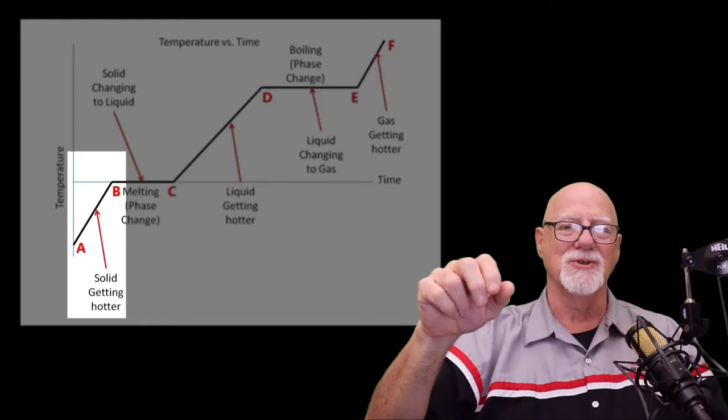Now, once that ice goes from 0 to 32, we added heat to make that happen. And since we saw the thermometer rise, we could see that. It's called sensible heat. It's measurable. We know it happened. We saw it warm up. Now at 32, that ice is going to stop getting warmer. And then as we continue to add heat, it's going to change from all ice at 32 to all water at 32.

Now, since that thermometer didn't rise, if we had a thermometer embedded in this process, we wouldn't see any change in temperature. But we added 144 BTUs to that 1 pound block of ice to change it to a 1 pound block of water. That's called latent heat. It's hidden, because we didn't see the temperature rise, but it took that much energy to change from a solid to a liquid.

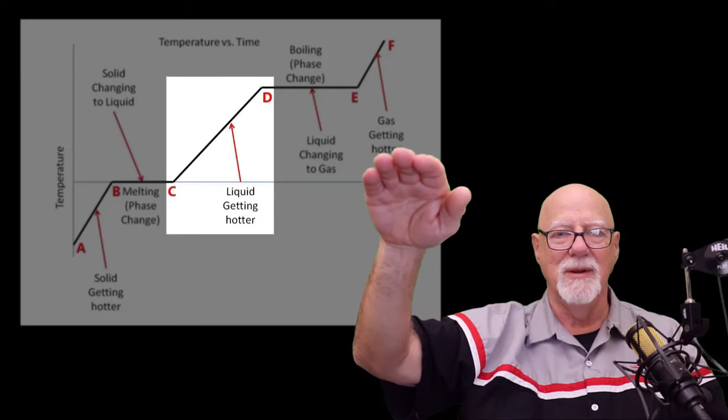Now, once all the water gets over to 32 degrees, we'll start to see the climb again. As we continue to add heat, the water's going to go from 32 degrees up to 212. Yes, we're going to have water at 212, and if we continue to add heat then, we notice that at 212, the line flattens out again. The latent heat we added to change from a solid to a liquid is called latent heat of fusion. And now we get the second state. We're going to change the water to steam. That's called the latent heat of vaporization.

And the magic is that's where it happens. It takes a tremendous amount of energy to change from a liquid to a gas. So to change 1 pound of water to 1 pound of steam, 970 BTUs have to be consumed to make that happen. That's the magic of air conditioning. It takes a tremendous amount of heat to change the liquid to a gas. It's called latent heat of vaporization. Now, we can take the 1 pound of steam, capture that and cool it back down. It goes right back to a liquid.

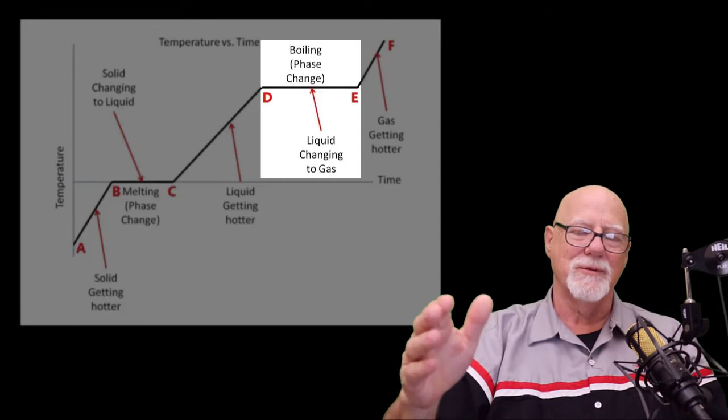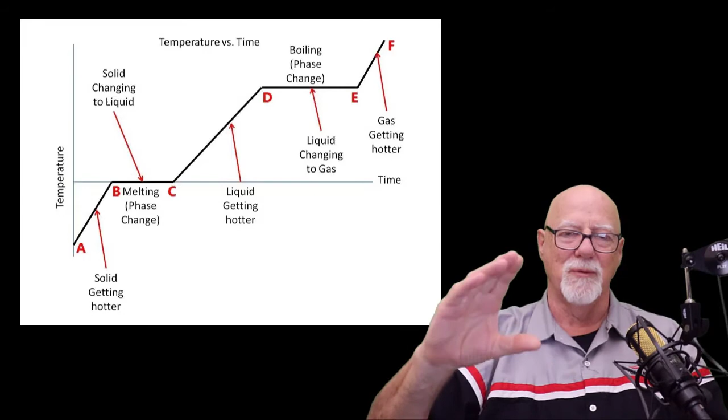Now, obviously, we don't use water in the air conditioning system, but for all practical purposes, this is what we do. It's a refrigeration cycle. It's going to take a liquid that will change from a liquid to a gas at a much lower temperature, which is refrigerant. People say Freon, which is a trade name of R12 from many years past, but it's a refrigerant which can change from a liquid to a gas at a much lower temperature.

Over on the left-hand side, you'll see a real simple mock-up of the changes of state of the gas and liquid. Trust me, air conditioning is much more complicated than this. This is how it works at the core.

You have all kinds of controls on how to make sure it doesn't get too cold or too hot, and we don't freeze up the evaporator and turn it into a block of ice inside the car, and how to deal with the engine revving up and down that drives the compressor. There's a lot of controls that are outside the scope of this video. So we're just going to look at how we do the change of state in a car and move the heat from inside the car to outside the car.

So now let's take a look at the refrigeration cycle. We're going to take a look at how we change from a gas to a liquid, liquid to a gas. And like I say, we change from a liquid to a gas inside the car. We evaporate and pull in heat, take on the latent heat of vaporization. This latent heat means it changes state but doesn't change temperature. Pump it to the outside, condense it back to a liquid, and bring it back around.

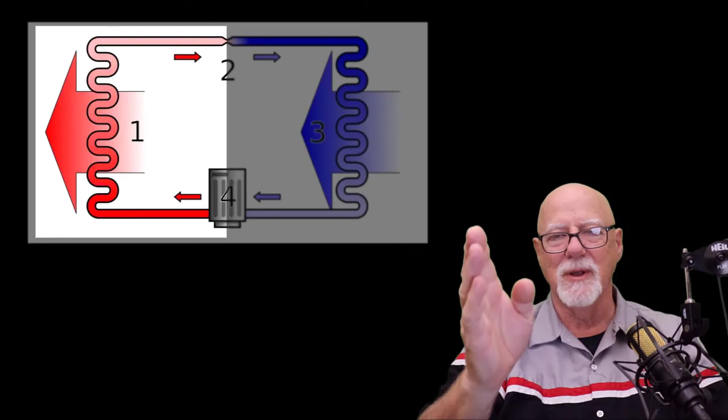So everything on the left-hand side of the compressor and number 2, that restriction, is all going to be high pressure. Everything on the right is low pressure. So the compressor's pumping around through to 2, and actually at 2 we have a liquid. So we have a high pressure liquid. It goes through the restriction into the low pressure side. And we take that pressure off of the liquid refrigerant and drop the pressure. It's going to start to change to a gas, because refrigerant will change from a liquid to a gas at very low temperatures, not under pressure.

So we depressurize it, and as it sprays refrigerant inside the evaporator, which is number 3, that's where it's going to change from a liquid to a gas. It's taking on latent heat of vaporization, pulls it right out of the cabin of the car. We're blowing our hot, moisture-laden air inside the car across the evaporator. It's pulling that heat right out of the air and changing the liquid refrigerant into a gas. Remember, that's called latent heat of vaporization.

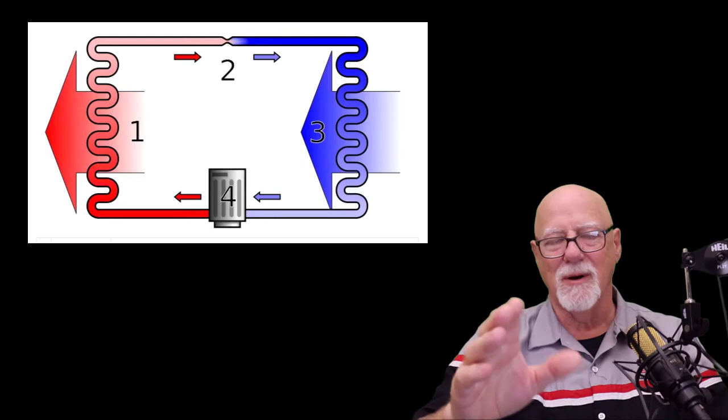The heat is causing it to change, because it doesn't really matter that much about the temperature of what comes in the car and outside the car. If you were to hold those 2 different pipes, you're not going to notice a big difference in temperature. You're like, well, how is this working? The magic is in the fact that you change from a liquid to a gas inside the car. You pull in huge amounts of heat from the latent heat of vaporization.

Now when it leaves the evaporator inside and comes back around into the compressor, it's still a low pressure gas. It came in as a low pressure liquid, changed to low pressure gas. You can't pump a liquid, so the compressor has got to be dealing with gas. It comes into the compressor as low pressure gas, and then goes to the high pressure side, the red side. And the reason it's high pressure is it's pumping against the restriction at 2. Now we take the gas, which is a lot of BTUs, and we pressurize that, get it good and hot, and then we blow air across it at 1.

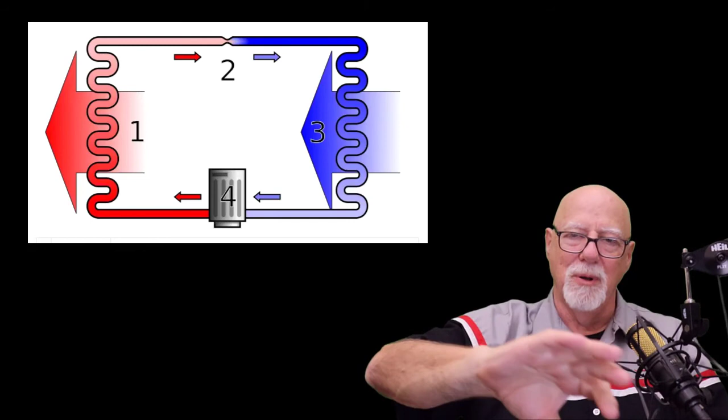That's the condenser. And the condenser's out in front of the car. It looks like a little miniature radiator. So you're riding down the road, and we're taking ambient air and blowing it across the condenser. And that's real hot because we pressurized it. We pull that heat away, and then that refrigerant can go right back to a liquid again. So we use a material, refrigerant, that changes from liquid to a gas and gas to a liquid at a temperature that we can work with to cool a car.

We're not dealing with ice, thawing ice and steam. We just use that as an example because that's something in our physical world. We see steam, we see ice, and we can kind of wrap our brain around the latent heat of fusion and latent heat of vaporization. That whole thing's repeated in an air conditioning system using a refrigerant, and it all happens at a lot lower temperature that we can use to move heat from inside the car.

I hope this didn't confuse you. It is a topic that generally takes hours and hours to cover. We haven't even got into controls, which is outside the scope of this whole course. This is the refrigeration cycle. This is how you move heat from inside the car to outside the car. It's the magic behind making something cold.